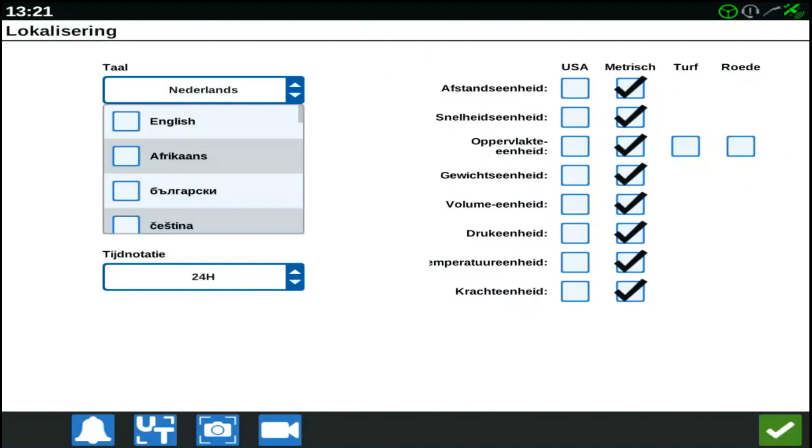And in this menu, you can do all kinds of settings. First thing I'm going to do is go to region settings, and I'm going to change the language to English, because I think that makes it a little bit easier for you as well. So now it's a little bit more universal. So now I've quickly changed the language from Dutch to English. And there's of course a lot more languages available.

So to get back, you first go to the machine garage. That's on the left side up top here. So I push machine garage. And now it will open my machine garage. And as you can see, I do not have a tractor selected nor a machine.

So the first thing I do is push this plus, and then I get the option to configure a machine and an implement. So first I have to create a new machine. So create a new tractor, push create new machine. And then I get an option to choose, for instance, a traditional, self-propelled, articulated, and so on kind of machine. Well, since I just want to have a tractor, I just give it an easy name, training tractor.

So now I just give it the name of your tractor and the model. So for instance, Case Puma, and then the number 130 or something. Then we go here in the bottom, next, and then it'll want the value, so the height of the antenna. And as you can see, that's taken, so value set in UT. What does that mean? When I go to here, we go to the UT for the ISOBUS machines.

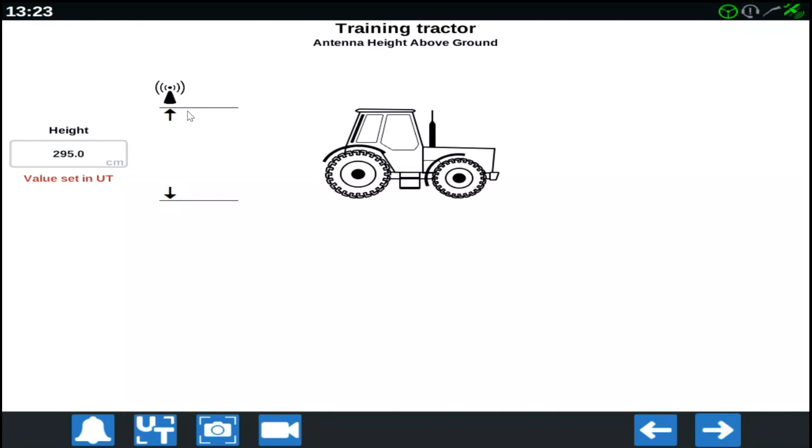Oh, it wants to load, so I'll get back to that in a bit. Takes a little bit of time, don't want to wait. So now it takes over the values from the RS1. So this is for the height.

We go to the next. It wants to know the offset from the center, which is also taken from the UT. And it also wants to know the position of the receiver compared to the rear axle. So the distance from the rear axle to the receiver. And those values are all taken from the UT. And that's from the profile calibrated into the RS1.

So now, if we go next, the system also would like to know the distance from the rear axle to the front hitch, from the rear axle to the 3-point hitch, and then to the drawbar, let's say like that, tow point. And these values can't be taken from the RS1 because those are not in the RS1. You have to measure them yourselves, and these ones are very important for proper section control.

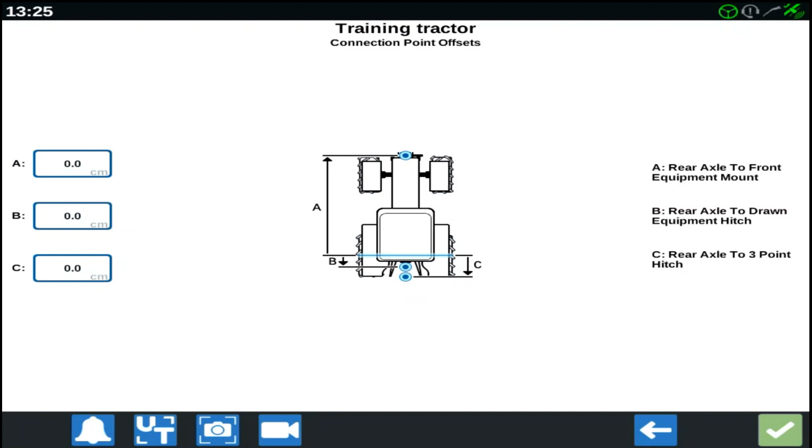So for the system to know when exactly the fertilizer spreader should start spreading. The more accurate these values are, the more accurate your section control will be. So these you have to measure yourself, and these are very important. So then we go to the green check mark. So now here up top, you can see that we have configured the training tractor in this case. And if you just push here in the middle, you can change.

As you can see, I have a long list of tractors that I've created that are in my system. And that way, if I would put my CR12 into another tractor right now, I could change from T7, for instance, to T8. So the system knows exactly what tractor it's in and what measurement it has to take into account.

So now we have set up our tractor, and now we're gonna mount equipment on the rear in a 3-point hitch. So as you can see, there's a long list of implements, but these are all virtual implements. It's really important to know they are not ISOBUS machines. So if I have, for instance, a weeder here, it doesn't do any ISO tasks. So it doesn't lift up my weeder if it's an ISOBUS weeder. And that's really important. I will show you later on how to work with ISOBUS machines and how you can distinguish them in the list.

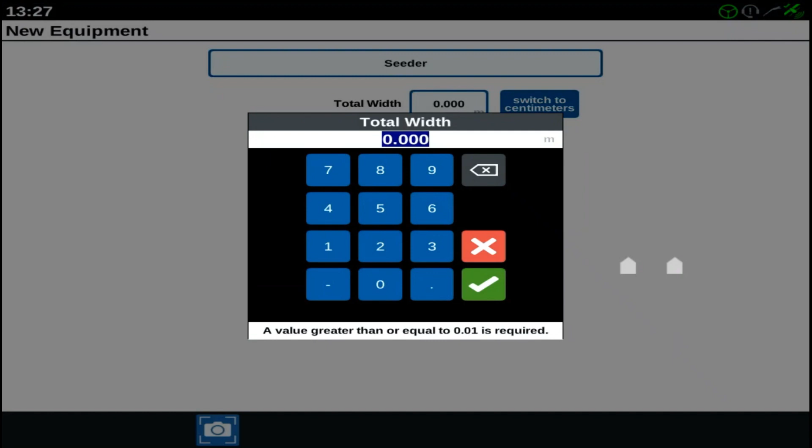And please pay attention to the units. You can switch to centimeters, but that's very important. That's also with all other units you have to fill in, pay attention to it, because I've seen it a lot of times that, for instance, centimeters were entered while the system expected meters. So if you put 3 centimeters, or you think 3 centimeters, and then it's meters, or the other way around, the system might do some strange things. So please pay attention to the units.

So we have total width of 3 meters, and then I will give it 4 virtual sections. So we go further, and now we can define the width of each section. So for instance, if one section is a little bit wider or one is smaller, I can change that as well, but I won't change anything here for now.

And then we go further, and then it wants to know the distance from the 3-point hitch to the working point of the machine. Now I'm just going to give in, for instance, 70 centimeters. Again, this is also important for proper section control.

Also, if we have an old bead seeder that usually has an offset to the right or to the left, we can also give in, let's say I want to have 50 centimeters to the right, and then it will take that into account as well. Just an example, you can also go to the left. It doesn't matter, but it takes that into account for your guidance. So now we push the green button. And here you can see that now my seeder is connected.

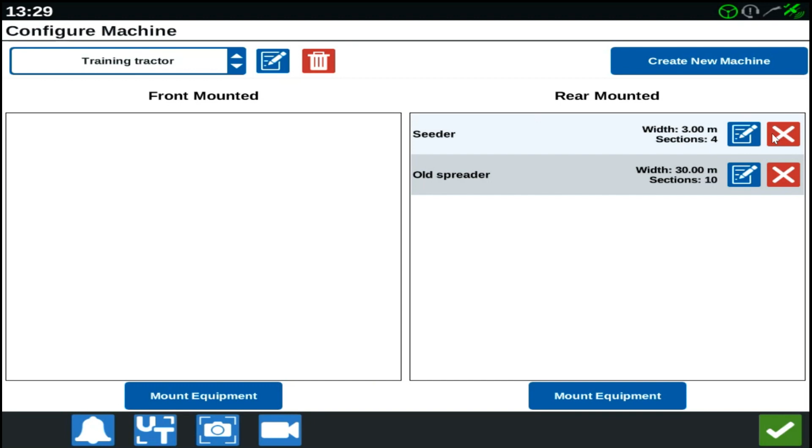Also good to know is that the cross for CRx means deactivate. So if I push the cross here, it deactivates the old spreader. But if I push the red button here, it's a waste bucket, and it will delete it. And that's for everything. I will show you again later as well. Waste bucket is deleting and a cross is deactivating. And the pen and the paper, that's always editing.

So now we have a tractor, we have a seeder, and now we are ready. You can see it here as well. We are ready to start a job. So now we go back. We push the green button here. And then we are in our start screen again.

So as I explained shortly earlier, there's 3 ways of working. And first I will discuss the quick job, quick AB line. So if you want to do quick AB, then you gotta push the button right on the bottom here. This is for quick AB. So if I push it right now, it will open up a menu where the grower is already filled in, the farm and the field. We always work with the grower, farm, field. And then also the job name.

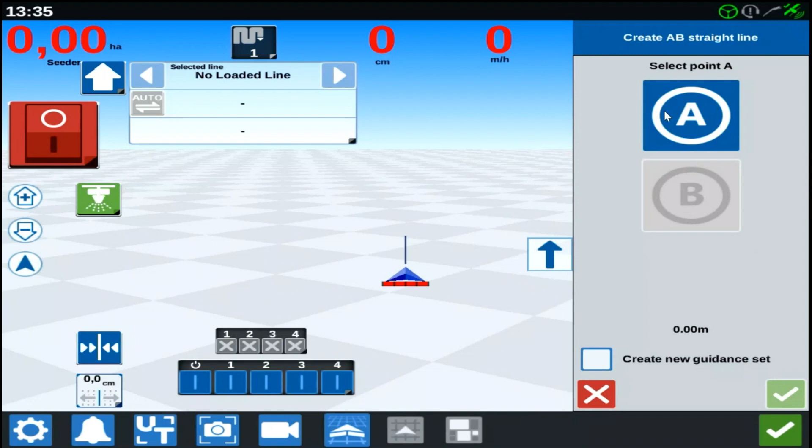So first we're gonna start, because it was a quick job. We want to have an AB line. I push the line button and then, in this case, I select AB straight. So now we push the A button and then I start driving forward. Oh, it wants me to accept it. And as I am turning, the line is also moving with my position. If we look from the top here, we can see it a little bit better. So if I go to the left, the direction of the line is also moving with me.

So now I'm at the point where I want to be, and it's good to know that the minimum distance for the AB line is 10 meters. So that's good enough, because I have 132 meters, as you can see here. I push B. If I want to change my position for B, I can do it now if I wanted to, but I don't. And then I push the green button on the bottom, and now I have created an AB line.

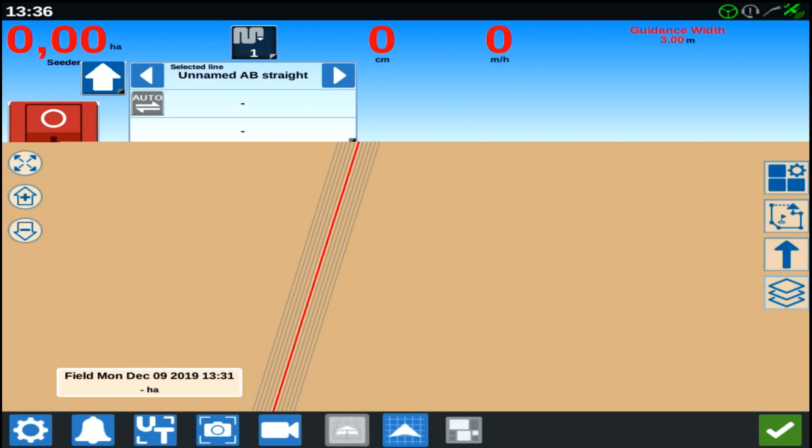And now when I move to the line, I am able to start my guidance. So now we have created an AB line. Real easy, and now I can just go and mow and drive around. All right, so now we have an AB line. We come to the headland. Even though it's an easy task, not too complicated, I still want to have an additional line. In this case, I want to create an A plus.

I go to the line option again here on the side. As you can see, now AB straight is selected. But I want to give it another name, because otherwise later on I do not know what the name was again. So now we push the pen and paper, and I change the name to straight line. So now I know.

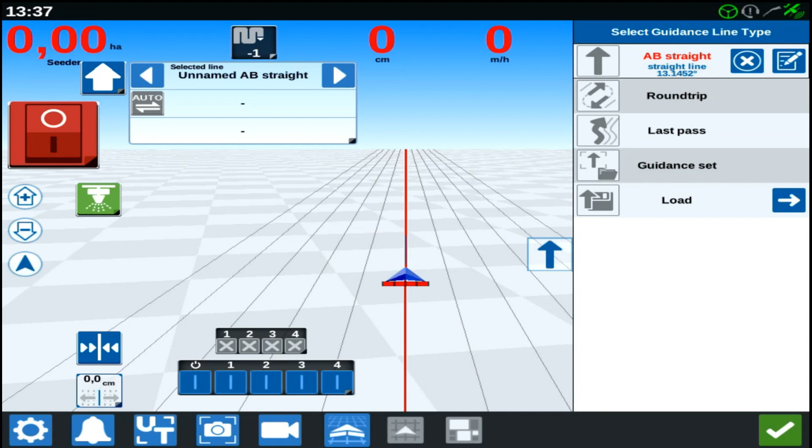Normally, of course, you will give it a name that suits you, across the neighbors, alongside the ditch, whatever. But now I just do it easy, straight line, accept it, and now I have named my line. AB straight, and it's called straight line. So now, like I said, I want to create an A plus line. I push the cross, so that means deactivate and not delete.

And you will see it as well. If I push it, it says confirm clear guidance line. It doesn't delete anything. Now, if I push this green button, my line is still there, but I cannot see it at the moment because I did not select it. So now I turn around.

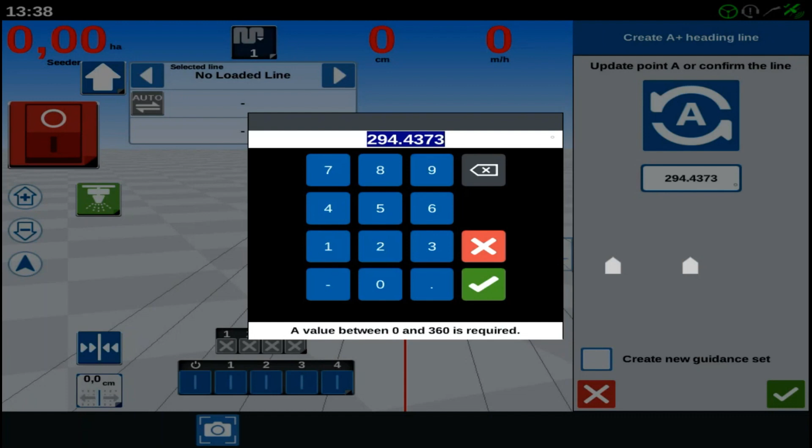I select A plus, because I want to do a line based on the heading. And now if I know the direction, I can already give it. So if I say I want to drive, so now I've pushed the button here, and now I'm able to change the direction to whatever I like. So if I say I want to drive on 280, so that's 280 degrees on the compass.

I can give that in, or if I do not change it, just take the direction I'm currently standing. So now I've created an A plus line. I push the green button again. And now I have my A plus line. I can drive on that as well.

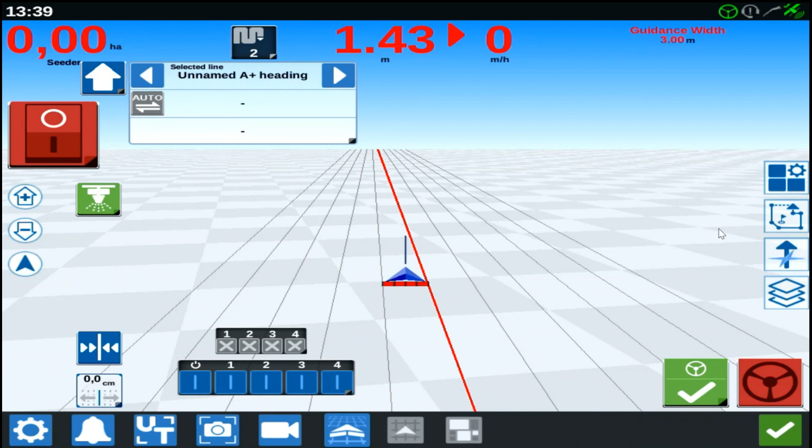So now I come to the other line again. And first I will show you a little bit the long way, and then I will show you an easy way how to switch lines. Because now I want to switch lines from my A plus line to my AB line. So how do I do that? I go here to the side again. I deactivate my A+ line.

So I had my A+ line, and now I wanted to go to my straight line. So now you can see I've loaded the straight line again. And that way I can change lines. Well, as you can see, that's maybe a little complicated because you have to push a lot of buttons. So that's why we come to the next thing. I go to the widgets because we have a nice widget for that to switch lines.

So we go to the widgets, and that's the top one there. If I push it, you will see a list of widget profiles. And as you can see, this one, Ronnie, is created by myself. And the other 4, sprayer, implement steering, default, and crop, are already in the system by default. It's possible to change them to whatever you like, delete them, you can do whatever you want.

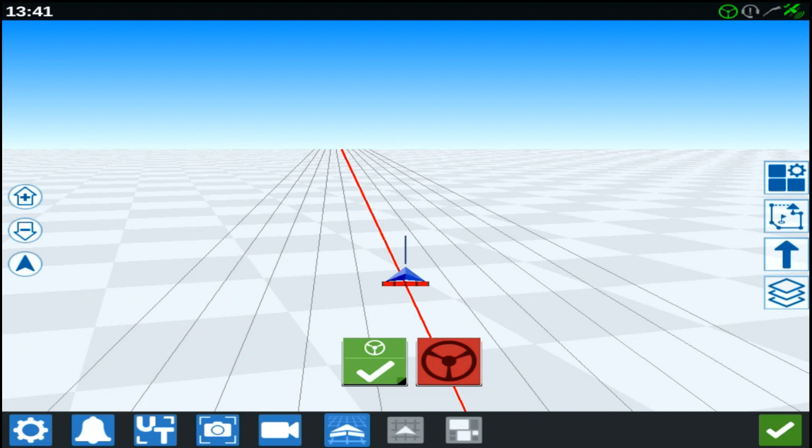So now I've selected something else. If I want to have the default layout, well, this is what the default layout roughly looks like. So with this, it's possible to create your own profile, but if I want to change the profile, I just push the pen and paper on the side, and then it'll give me the possibilities to change the name, to change the position. As you can see here, I'm now moving this one. You can change the widget profile to whatever you like and to whatever you want to see.

So if I push this button now again, I've activated, as you can see, the layout edit. If I push it, then it also enables me to move this button all the way to the right side if I want to. How do I get out of it? I just push this button again. The menu will open and it will give me the widget list again. Then I can push the cross again. And now I'm out of the editing mode.

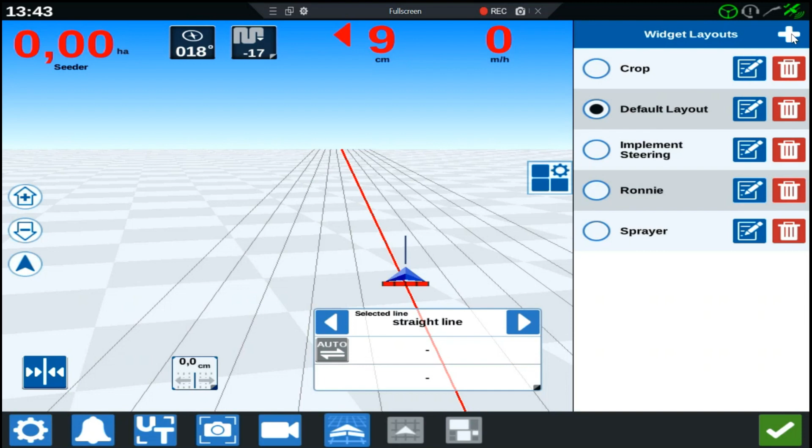I can also create a new widget profile. So for instance, I want to create a widget profile for each of my workers or for each of my tasks. For instance, if I want to see certain widgets when I'm seeding or spraying, I can add my own profile here. So let's say weed.

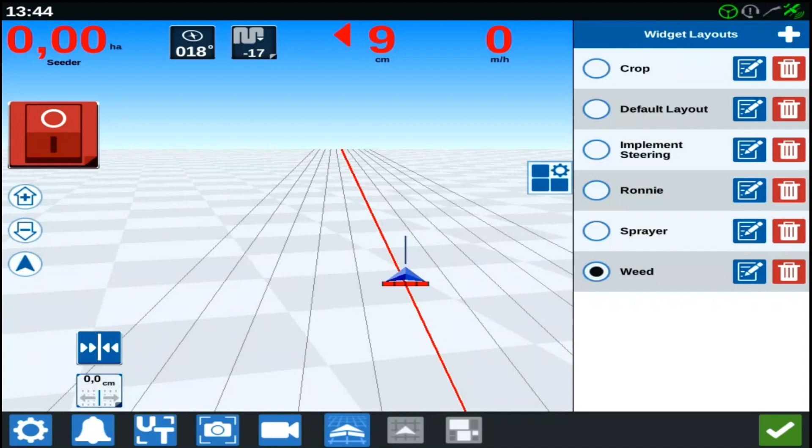And now I can add different widgets, as you can see. So there's a lot possible with the widgets, and you can change it to whatever you like. And there are a lot of widgets, and I won't discuss all of them, but there are a couple of widgets that I would like to discuss right now.

So I'm going to go to the default profile for that. I'm going to open up the widget by pushing the pen and paper. And now I have the list of widgets. And as I said and showed, the method for changing lines was a little bit complicated. And that's why there's this nice widget called Easy Swap. It's already enabled, but I'll just disable it and enable it so you know what it looks like.

If I disable it, it's gonna go away. And then when I enable it, it'll pop up right back here. And I'll drag it to the bottom because I want to have it in the bottom. So now I have the easy swap, and I will show you how to work with that because I think it's a real nice feature, a nice widget that we have.

So as you can see, it'll currently also tell me which line I am on. So at the moment, I'm on the straight line. So now by pushing this or this button, since we only have 2 lines, I can easily change my line. So now it's on unnamed A+ heading. Then we can go there. I come to the headland. Then I can push this button again and I will go to my straight line.

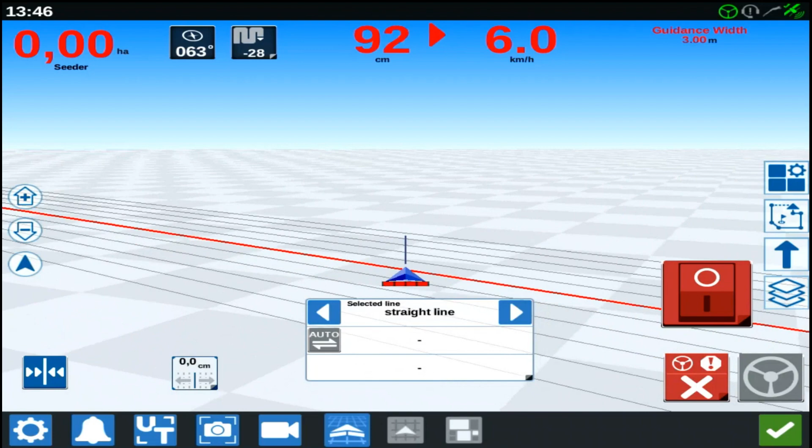Yep. So as you can see, it now also tells me recommended unnamed A+ heading. So if I now push on the recommended, it'll swap my line. It'll change my line quickly. It measures the direction you're going in, and based on that, it will give you a recommended line to take. So that way you can easily, with one click, change lines.

It's of course also possible to do that with the auto function. So now I have the auto function enabled. As you can see, now it's green. So now when I'm turning around, at some moment it will detect the direction of my straight line again. Oh, and now you can see that it will automatically change lines. However, as you can see, this takes a little bit.

This takes roughly up to 5 seconds because you don't want the system to directly change lines when you go into that direction, because then it might be too early or too late. So yeah, it takes a little bit of time for the system to change the lines. So keep that in mind when you activate the auto option.

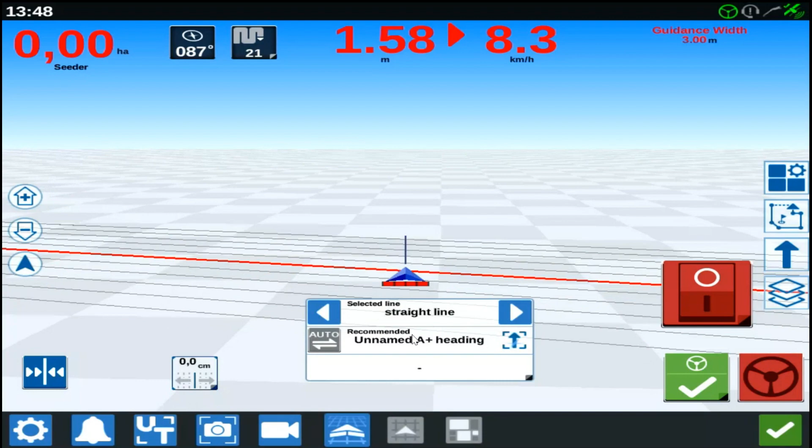Now I just push recommended, not auto, not anything else, just push here, recommended, and then it will change the line for me to the other one. So that's way easier. So that's the easy swap. Please remember that. That's way easier than deactivating the line, going to load the line, and so on.

So now we created 2 lines, and then it could be that in the end, or at the start, you created a line, but it's like this. As you can see, the red line here is already the field border, so I can't go there. If I go there, I'll be driving over the fence. And if I go over to the line that's currently red, I'm having like half a working width uncovered. So that's not what we want.

Then we have these two. If I go to the widget, I will look up the widget name again. That's called line calibration. So calibrate line. And then it's called line nudging. Just move these ones here.

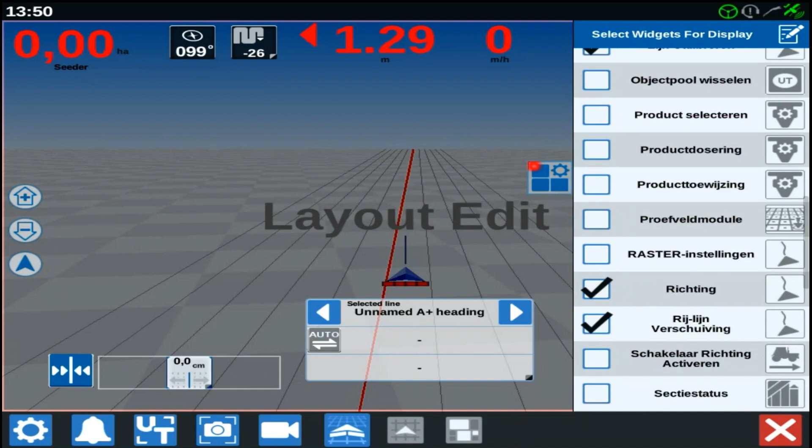So these are the two. So now, like I said, I want to calibrate my line. So I push this button and now it will calibrate it onto the center here, as you can see. And what you will also see is that the nudge widget shows me how much the line has nudged compared to the original line. So that's real nice to know, because then you can keep that in mind as well, or as we're going to go to, you can set it to a desired distance.

I hope you can see it, but in the bottom here, and that's also what this one has and this one has, there's a little edge folded inside. That's also for this one. So it means that it's an interactive, let's say it like that, widget. As you can see, if I push the widget once, a menu will open and you will see some arrows, big arrows and small arrows, left and right.

If I hold this nudge widget, a menu will pop up. And this menu will give me the option to set my nudges. So my small nudges, I can set it to 20 centimeters or 50, or I can even set it to meters, depending on what you want to do. And I can also do a big nudge. So now I want to do my big nudge, 50 centimeters. So every time I push the big nudge button, this one, it will go to the side, to the left or the right, 50 centimeters.

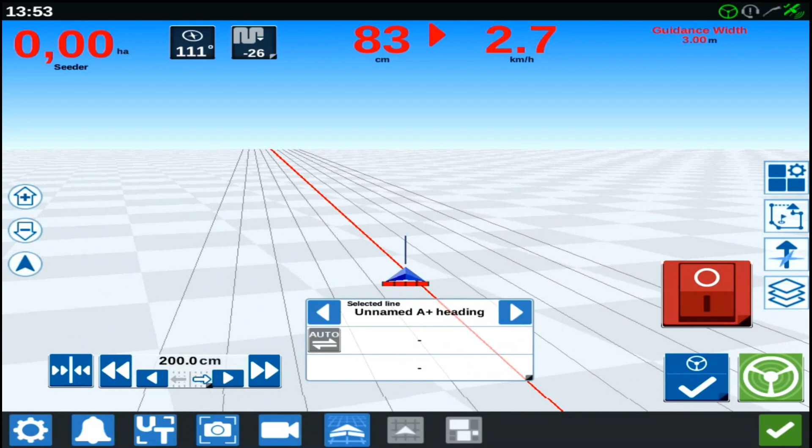So now if I push the big button here, it will nudge 50 centimeters. And that's what you will also see. Now it's 100. Now if I push it twice, it will go to the 200 and so on. So with those widgets, you can nudge guidance lines the way you want to.

If I want to create another line, I will have to deactivate my guidance line. But I have my line nudged and I don't want to lose that. So you will see what will happen. I will show you where to find that option. If I now disable it, a menu pops up and it gives me the option to override the original unnamed A+ line. It will give me the option to save it as a new line, or I can just ignore everything and discard it. So I just save it as a new line in this case. And now it'll ask me to deactivate the guidance line.

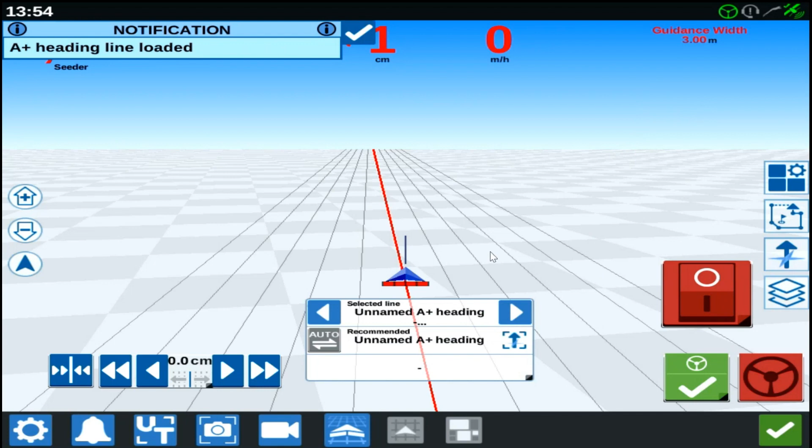So now I have the original line and I have the original line plus 200 centimeters. If we go to load, you will see that as well. Unnamed A+. And now I have the line I just created.

How do I get there? Or how do I get that pop-up if it's not enabled? You go to the menu, so the gear, you go to job settings, and then you have the enable nudged guidance line management pop-up. You can disable that if you want, you can enable it. So that's enable nudged, this option.

So now we spoke a little bit on how to create lines and so on. I just saw a question on how to do the round trip and the last pass functions. I will show you that later because for the round trip, I need a field boundary. So now I've been driving around in my tractor just kind of without anything going on.

And normally you kind of want to know where you have been driving. And that's what this big master switch is for. Now it's red, but now I push it and it will turn green. So now my implement will start drawing coverage and I will be able to see where I have been driving. If I push it again, it will turn red and so on.

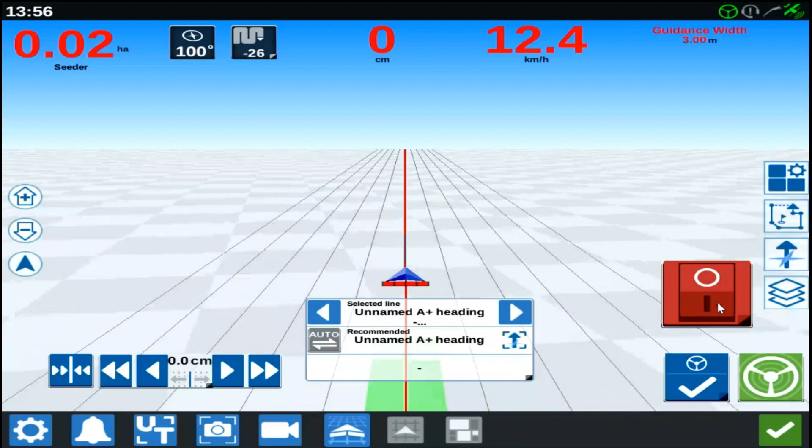I can also push this button again and then a menu will pop up. And then it will give me the option to activate the master switch, for instance, if I start steering. So as soon as I enable steering, the master switch will activate as well. And it's also possible to have auxiliary inputs. So take a signal from the hitch or whatever; it requires a 0 to 12 volt signal. And then, for instance, if the hitch is going up, the master switch will deactivate, and if the hitch is going down, the master switch will activate.

You can also do multiple signals, and if I require all on, then, as an example, I need to have steering enabled and I need to have the hitch down before the master switch will activate. It's just an example. There's a lot of possibilities in that as well. So now if I do steering, you will see that the on-screen option is disabled and steering is enabled. And now you will also see this little lock. It means that no matter what I do, if I push it, I am not able to disable the master switch. I'm only able to do that as soon as steering is deactivated.

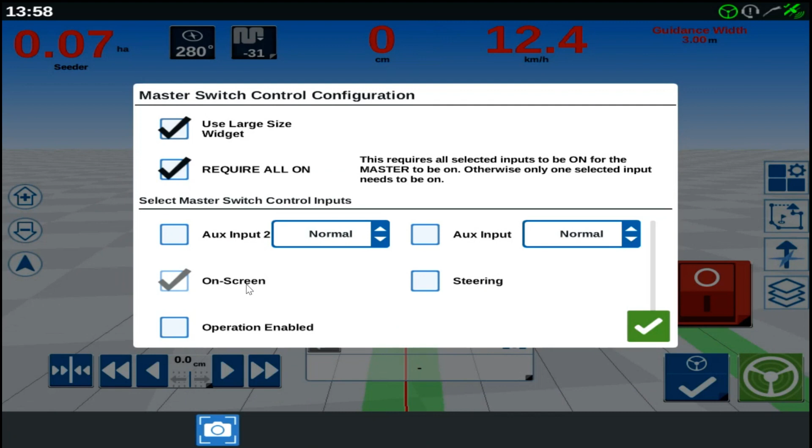So if you ever want to enable or disable the master switch, but you can't, just hold it a little longer and see what control inputs are required. Then you know how you can activate or deactivate it. That's something to keep in mind: if you see the lock and you want to start drawing coverage, but you do not know how, or you are not able to because of the lock, just hold on and you see, oh, steering, for instance. Now I disable the steering and then it automatically goes to on screen. So now I am able to, by just pushing it on the screen, start drawing coverage.

Well, like I said, then we go to the next features I want to discuss shortly. If we go here, I can do a scout feature, and then I'm driving in the field and I want to say, hey, there's a point of interest. I can say where I want to have my recording point, and I will explain a little bit more later on the recording point. But for now, I'll just click somewhere and then I have to create a name. Let's say like the tree. I say create recording point, and then every time I come back in this job, I will see where my tree is. So that's just a good thing to know.

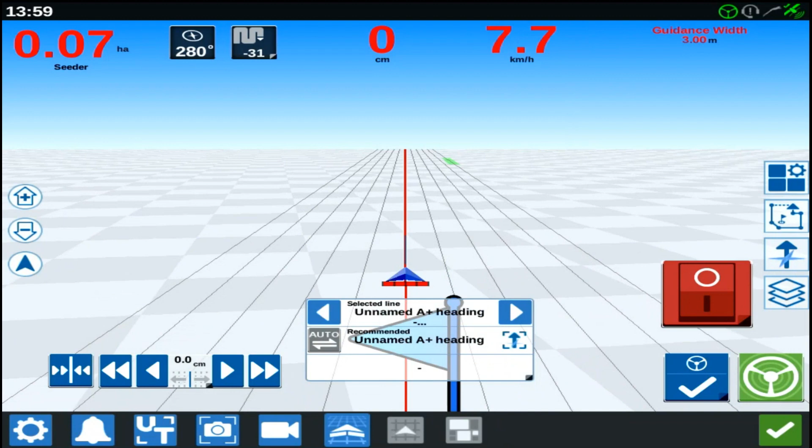And about the layers, I will get back later, because for that I need to have drawn a little coverage, and I will come back with a bigger implement. So now we've discussed a little bit on the quick jobs and the most important widgets for now. Of course, there's always more widgets. As you can see, there's a lot more, but to keep it a little short, because I could talk on it for hours and hours, I will just continue with the rest. So we have our job, and to get out of the job, we just push the green button, and then it'll show me confirm close job. Push the green button, and now we are out of the job.

So now we get to the second, a more advanced, let's call it like that, way of working, based on field boundaries. And in that, again, there are multiple options. So I'll first go through the, for me, easy one, because we can create field boundaries in CRx in two ways, with corner points and with a quick recording. That's what we call it. I'll show you that in a bit as well, but I'm gonna do the easier one first, and that's with a field boundary that's drawn in on the computer.

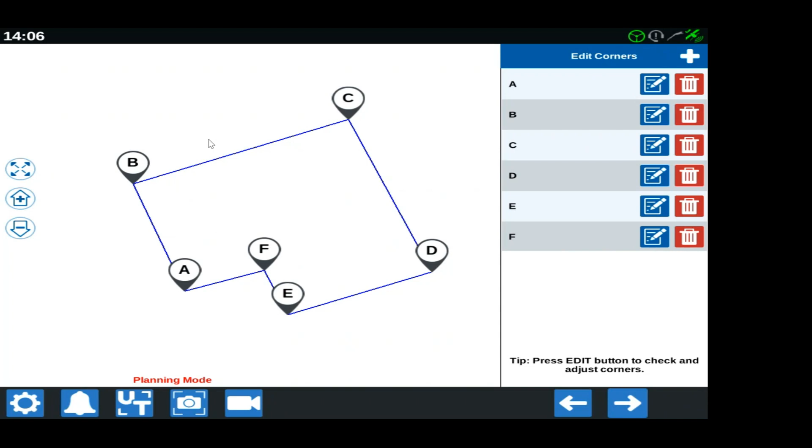So now all my corner points are there, so I'm not going to do that. But in a bit, when I create the field myself, I will show you how to do that. But it's also possible to change the positions of the corner points if I want to, and so on. And if we continue here, then you will see that the system now creates the field boundary lines based on the corner points we just created. So now you'll see A, F, E, D, C. Those are all guidance lines I can later on use.

And now if I select the field again, go to the next step, do a new job, push the button right, next and next, because for now this doesn't matter so much. I have my guidance lines, and now it will ask me, what line do you want to use? A, B, C, D, E, or F. And as you can also see, it's not really noticeable, but I've drawn a line in here as well. It's called to neighbor. Normally it will show you baseline, E, F, and so on, but it will also show you the guidance line you want to be driving on.

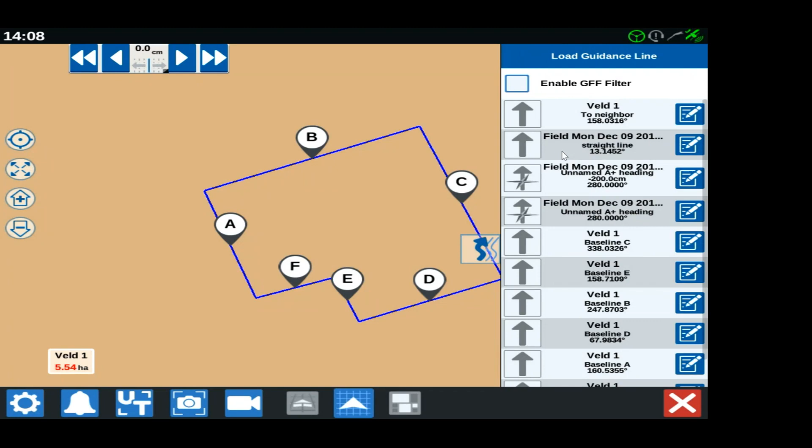However, for now, I'm just going to leave that. I'm just going to select line, so baseline C as my guidance line. And as you can see, I'm a little bit far off the field. I'm just going to go speed and power, full speed ahead to my field.

So now in my field, and as you can see, the first guidance line created is half a working width from my border. So I'm starting right, so the outside of my machine is exactly at the border as how I have drawn it.

So now, as you can see, it also shows me again the desired or the recommended line, and it also shows me all the possibilities that are there in the Easy Swath widget as well. So now if I come to the headland, I'll just go full speed ahead. And if I then turn around onto the headland, it will also show me line B.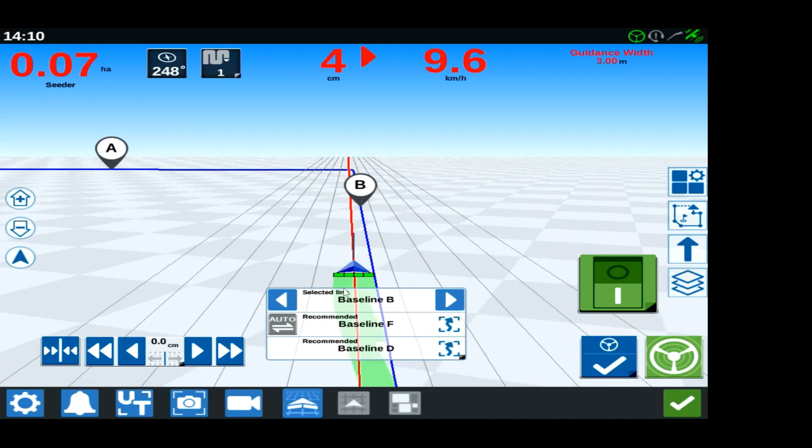If I now select baseline B, it will automatically change the lines, and then I'm able to continue on line B. So in this way, I can use the outside, so the field boundary, as my guidance line.

So now we got the question in the chat, how do I use the round trip? So therefore I disable the current guidance line. Oh, I shouldn't. It wasn't necessary, but I'm going to do it anyway. And then I'm going to push round trip. And what the round trip does, the name kind of says it already. It does a round trip from the outside of the field.

So at the moment I have 6 lines, so 6 times 3 meters. So 18 meters will be going around the field. So now you can also say, I want to start with an offset of 3 meters. So one pass not seeded at the moment. I can give an offset, and then to really work with it, I have to push here field 1. So now I have 6 lines, field 1, and then it'll start. As you can see here, it has drawn 6 lines around the field.

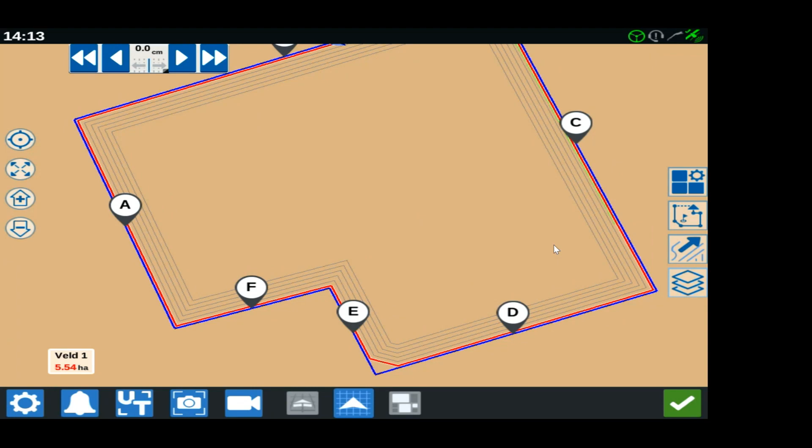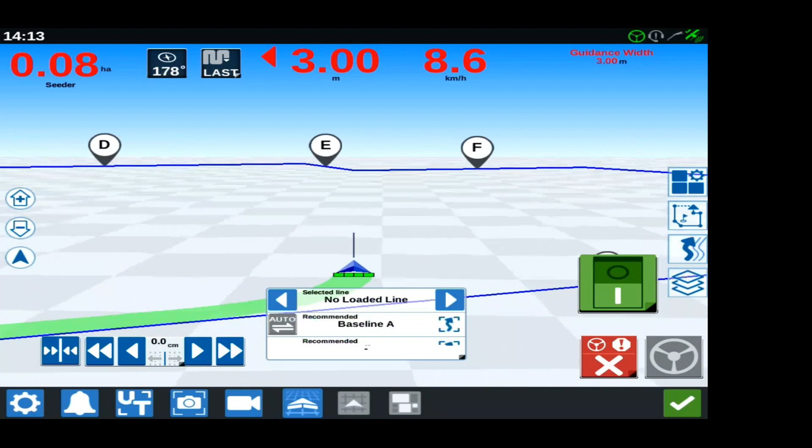Then what last pass does, last pass creates a guidance line, as you can see here, based on your last laid coverage. So if I slowly try to drive forward, for instance, it's used a lot in spraying. You just start on the outside. Hopefully, let's try. So now I have last pass enabled, speed up a little bit.

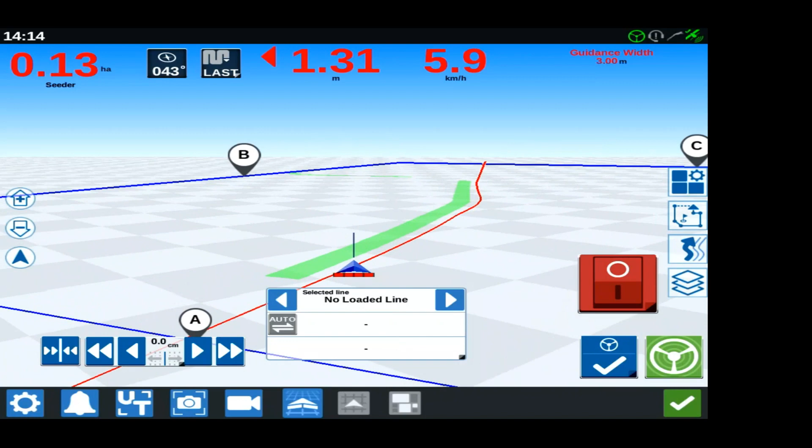Now when I come back, it has created a guidance line that is half a working width away from my previously created coverage. So that's what last pass does. It creates a guidance line based on your last created coverage.

So now I've shown you how to load a field from, for instance, a USB stick. And then I suggest we do a short little break until 8:05, so roughly 5 minutes. And then we continue on how to create field boundaries yourself in CRx. And I'll also then discuss the operations plan and the ISOBUS settings. But I suggest we do a short little break right now.

Quick break. I hope everyone could grab something to drink, fill the glasses again. Now we're going to continue with the creation of fields, and therefore I'm just going to drive a little bit away from where I'm currently at.

So I'm just going to start here. And then I'm going to go to my fields here again on the sides. And then I'm going to create a new field. I'll select my own grower, myself. I select my farm, it's the test farm. And then I give the field a proper name. Give it something that fits you best. Call it at the neighbors, or whatsoever. We're going to continue here.

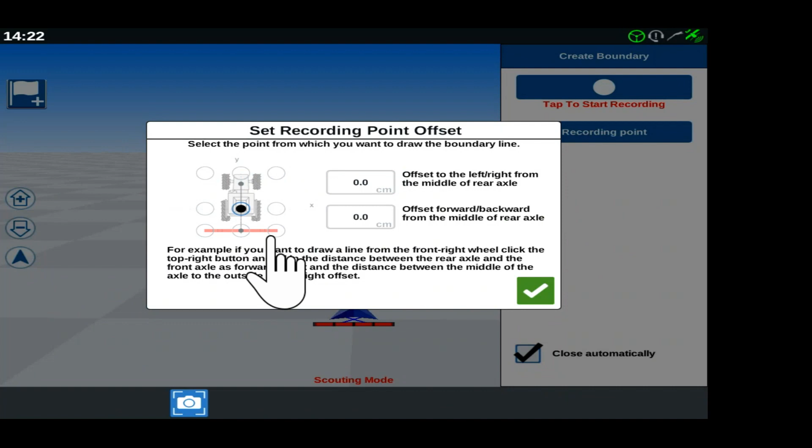So if I go to quick recording, select it, and then we get to the scouting mode. And as you can see, this here is the tractor again, and this blue cross is our recording point. Put this away. That's my recording point. So if I push here, recording point, I can set it to wherever I like. If I want to have it onto the center of the tractor, I'm not able to change it, but I can also set it to the right side of my implement, depending on the measurements I've given in. So I can put a reference point wherever I like it.

There are customers that create a little device that they use to record field boundaries, and then they can set it exactly to where the device hits the ground, so they can record the fields as accurately as possible. So I accept it. So now my recording point is there. And as soon as I start recording, tap here to start recording, you will see that it'll start blinking red. That means we are recording, and as you can see, there's a blue line. I'll just zoom out a little bit so you're able to see it better. So there's a blue dotted line coming behind the tractor.

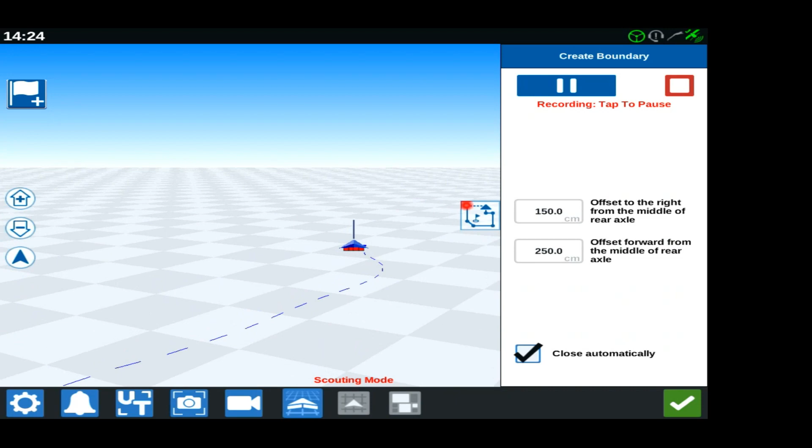As you can see, as I'm moving around, the field boundary is also moving around. So if you're going to do this, make sure to get it as accurate as possible, that you drive as straight as possible, and do not do anything else while you're doing it, because otherwise the lines are also coming along. So now, for instance, I get to a point where I can't continue. There's a tree in the way, but my boundary is still straight, and I don't want to mess up my boundary. I can just press here, then it will pause the line. So then I can drive around the obstacle.

And then as soon as I'm past that object, or the corner, I can just push here and it will draw a straight line between the last point I've driven and the point where I started recording again. So I go around the corner, for example. I'm trying to get a straight corner. And now I continue again. I'm speeding up a little bit at the moment, and as you can see, my driving gets less accurate. So this is the field I now created.

So now I pause again to try to get a rectangular corner. I'm speeding up a little bit. So as you can see here, these lines are not straight. They are exactly how I've driven them, very curvy. And as I'm getting close to the corner point, as you can see on the bottom right, I've enabled the option close automatically. So now when I get near the starting point, it closes the field automatically. And now I have created my field boundary using a quick recording.

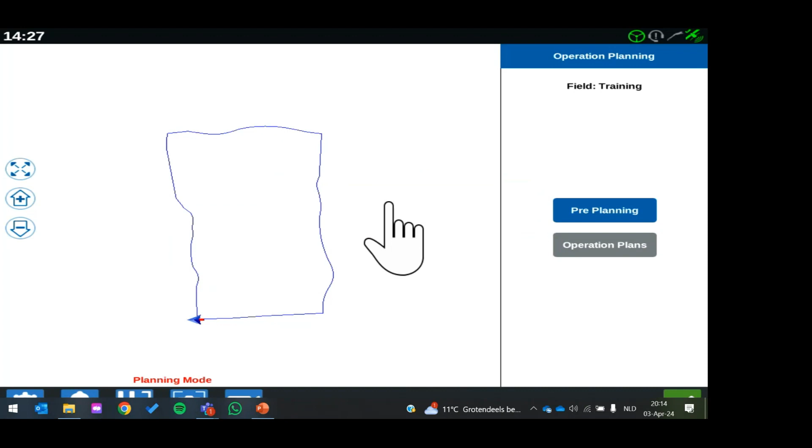All right. And then, so now I've created my field boundary. So then I go to operations planning again, because we have to go to the pre-planning again. So now I push pre-planning. And as you can see, the system has some more difficulties in detecting my nicely created corner points. So now I would really like to change some of these corner points.

It's also possible to move it with this button or with these buttons, but be careful because these buttons move the corner point north, south, east, or west, and not in the direction of the guidance lines. So yeah, be careful with that. I usually say try to prevent doing that.

Oh, no, it's go away. No, no, apologies. This is better.

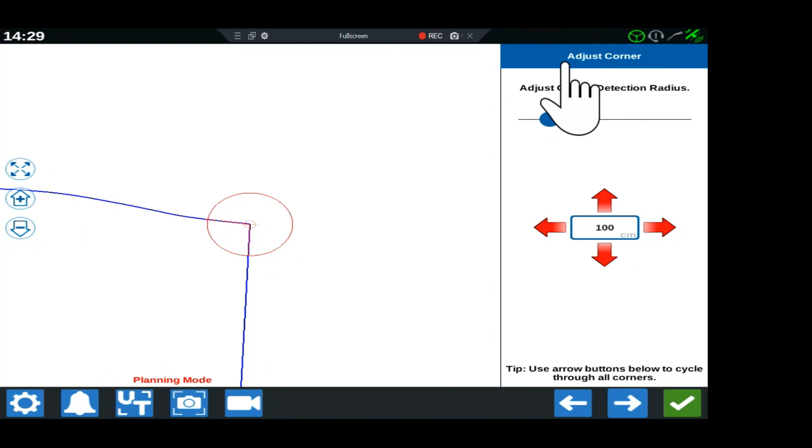So I usually say prevent moving with that because usually you can't get the desired results, but it's possible. But at the moment, I think my corner point's good. I push the green button. So now I've added my corner point there, and I also want to have a corner point there.

So I push add a new corner point, click there. And as you can see, it depends on my radius where it will put my corner point. So if I increase it, I want to have a straight corner. So this is how I like it. So now it's created a corner point there, and I want to delete in this case because I do not agree with it. I'm going to delete corner point A. So now I have 4 corner points.

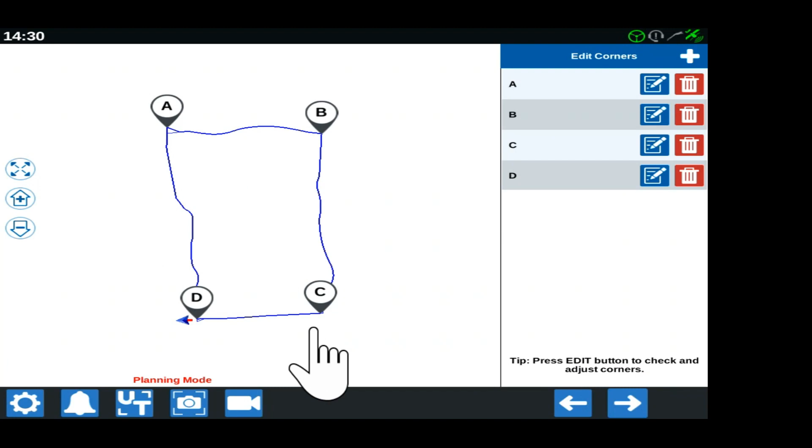When we continue, it'll detect my lines. And now I can also say, hey, they are curved, but I want to have them straight. So if I straighten them all out, you will see what a difference that makes. It will just draw a straight line between each corner point. So I'll just leave B and D as a curved line, and A and C I will have a straight line. And now I can drive on those curved lines as well as on those straight lines if I open up a new job.

So that's the first possibility of creating a field boundary. Now we're going to go to the second possibility. Then I'm driving further again. Up, up, up, up. So then I'm going to add another field. And I call this field, just to keep it easy, corners, as I'm going to create a field based on corner points.

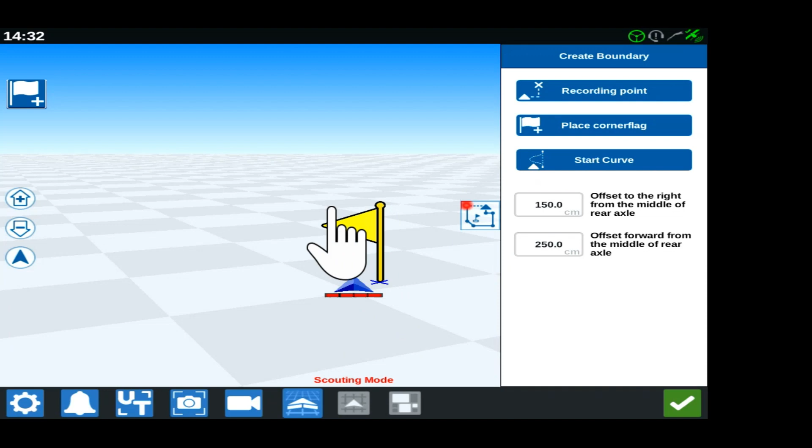So now I'm going to go to field recording. I'm going to record corner flags. And now you kind of have the same options. We can set the recording point in here again. But now I want to be a little bit closer for now, so I'll leave the recording point. And now I just turned into the first corner of my field. And now I'm just going to place a corner flag. So now a yellow flag will pop up, and that means that it's a corner point.

So when I zoom out again and I start driving, you will see a red dotted line being drawn. I'll just go from the top view because that makes it a little easier for displaying right now. And again, this works kind of similar to an AB line. It will draw a straight line, but it will follow my direction. So if I move around, the straight line will move around with me.

So now I come to the second corner and I place a corner flag, and we'll see a second yellow flag popping up, and you will also see that my red dotted line has now turned blue. So that means that it's fully defined, and it won't change anymore. So now we go around the corner.

And now I'm gonna start with a curve because my field doesn't have straight edges all the way. It has a curved boundary, a curved field side as well. So that's why I'm gonna start a curve right now. And don't start a curve right away as soon as you place a corner flag. Just drive a little bit forward.

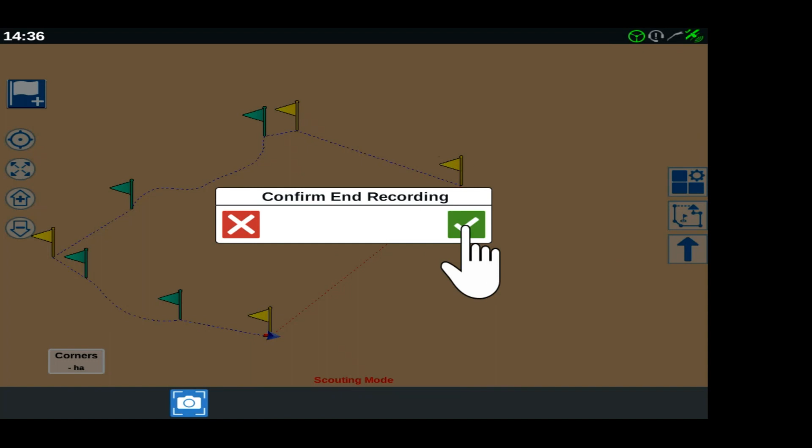And then I say place corner flag, and now when I quit the recording, it will automatically draw a line between here and there, so between my first and my last corner point. That way it will close the field. So now I push here, and as you can see, it will ask you to confirm end recording. I say yes, and you will see a line being drawn here. And now the field is complete.

So now I have the option to add another boundary. I personally do not recommend that. It's possible, but the best way would be to create for each field its own boundary and not two boundaries in one field. I can go to the pre-planning, that's where we fully define the field. And it's also possible to add a guidance line.

So if I want to, for instance, later on do an operations plan based on an A+ line or an AB line, I can, before I go to my pre-planning, already add a guidance line. So if I know in what direction or along which side I want to have an extra line, I can already do that right now. Or I can go to the home screen, but we are going to go to the pre-planning.

So this is our field boundary. Now we go to the next page, and it'll show you all the corners we just created. As you can see, not all corners can be edited. They can be deleted, but not edited. That's because F, G, D and C are curve points. Like I said, the green flags, and you can't change those. You can only change the yellow flags.

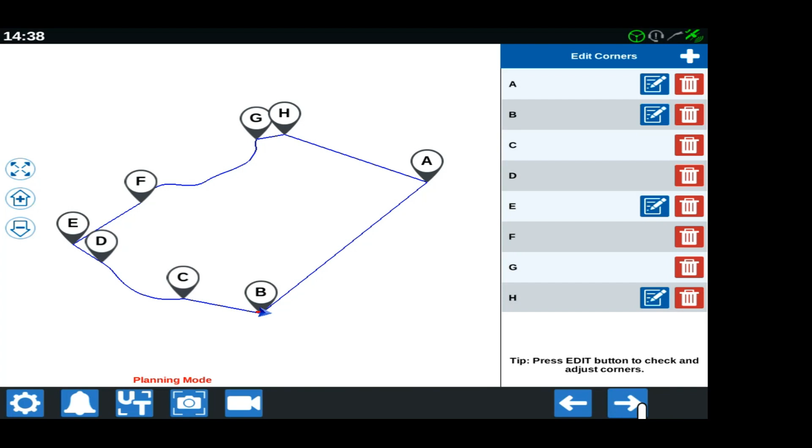However, at the moment, I'm fine with the way my field's looking. All corner points are there. I go to next, and now I have the same lines. Like I said, I can straighten them out. In this case I don't care, but I want to leave F as a curved line. However, I don't want to be switching lines. So when I go from E to F and from F to G and so on, I don't want to switch lines every time. I want it to be one line.

I can then push here, join lines, and then select F, G, and E. And if I push here, it'll create one guidance line of it. Again, I can straighten it out. Or if I think later on I don't want to have it as a joined line anymore, I can also split it again. But I also want to join lines for the bottom, B, C, and D. So now I have 4 lines again.

Push green. So now, as you can see, before, the pre-planning was blue and operations plan was grayed out. And now we finished pre-planning, so it's green, and the operations plan is now blue, so it's possible to create an operations plan.

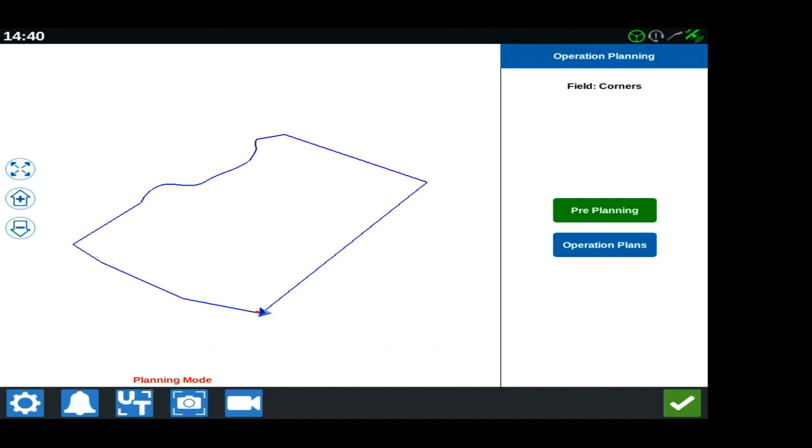So what's this operations plan then? I already discussed the first two possibilities of working with CRx, the quick job and working based on reference lines from field boundaries. So now we're going to go to the operations plans.

And with operations plans, I always say, call it the crop and the year, what you're doing. So if you're doing potatoes, I'm going to call that potatoes 24. So I will be using this plan that I'm going to create the entire season for my potatoes. And what does that mean?

So I will create a swath where my potato planter, my ridger, my haulm topper, everything is on 3 meters. And then every time I will use the same plan. So here you define the working width of the main machines, let's call it like that.

Then we have the option to set up tram lines if we want to use tram lines. So now we can say tram lines, and there you get the option to set up the type of sprayer, if you want to use extra width, and how many swaths there should be from the field boundary, the reference line, to the first tram line. So at the moment I have a sprayer width of 33 meters, and then it will automatically say 5 swaths to the headland. Of course, I can change this, and then between each tram line there will be 10 swaths.

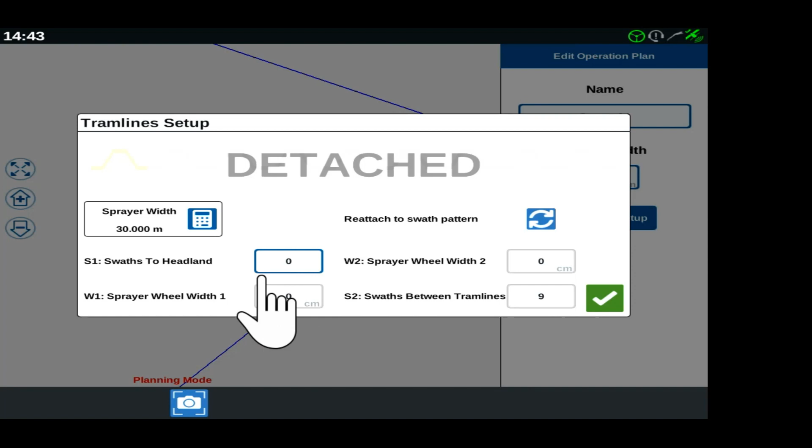So as you can see, now I'm spraying with 30 meters detached from swath pattern, and 0 extra swaths to the headland. So now if I continue and I have selected region A, you will see that the tram line is in between working swaths. Whereas in the previous situation, where it was 33 meters and attached to the pattern, a tram line was on a working line. So with this option, it's possible to use sprayers where the working width doesn't match with the pattern when you're working, for instance, with 3 meters.

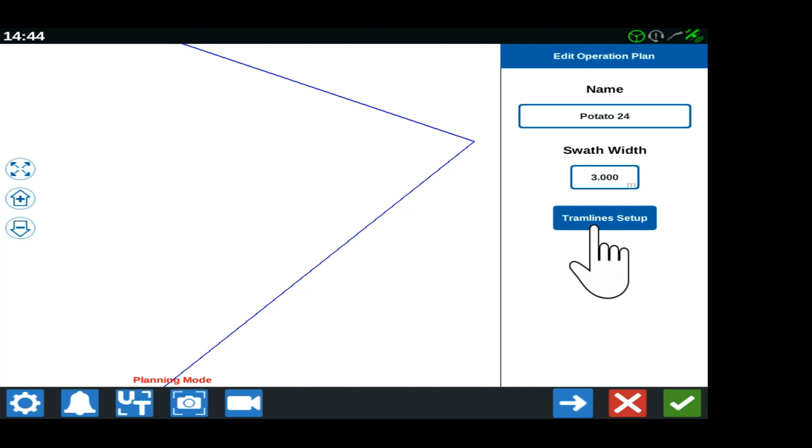So now we go back, we say tramline setup, we reattach it again, because if we have 3 meters, it's then also possible to add some extra width in the tram lines. As you can see here, I've added some width on the left side, and I can add some width on the right side. So there will be a working pass, and then on the left side and the right side of the pass, there will be 1 meter extra.

So when is this used? A very nice example is in the Netherlands, where they have tulip fields and they plant on small tires, think 38 centimeters. And when they come back and want to go spraying, they don't want to drive in between the beds on small tires. They want to have a little bit extra width between the beds in the tram line to be able to drive on wider tires. So this way, it's possible to drive on wider tires for spraying.

Of course, also when you, for instance, do potatoes in the tram lines, you can put the cultivators down. So then there's 2 paths of 75 centimeters that are not planted. And if you want to spray on tires that are 60 centimeters, as an example, you can say, I want to have a negative spray wheel width. So then your tram lines will be 20 centimeters less. So if I put this to 10, in total they won't be 3 meters, but 2.80.

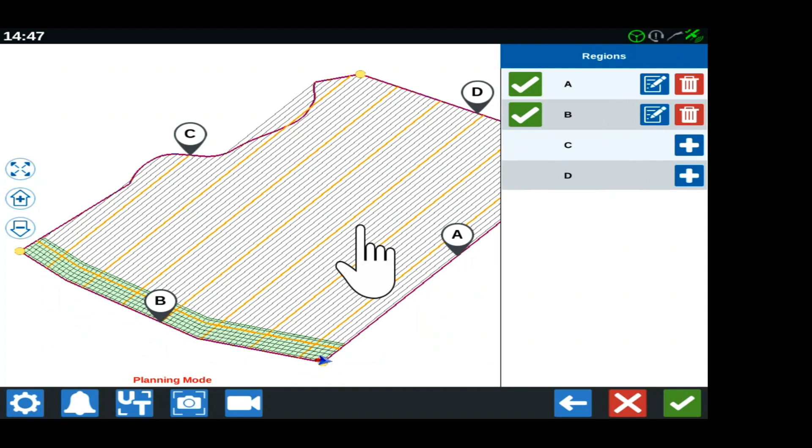So now I am also able to add or change my main region. So if I go here and push the pen and paper, I'm able to change my main region. As you can see, there are different options. I can set it to a headland. I can give the number of swaths. I can also change the direction. I can also give it an offset to the field boundary.

So for instance, for my first pass, I want to leave the first 3 meters from the field boundary because I want to seed flowers later on or whatsoever, but I first want to start potato planting. I can set offset to field boundary to 3 meters. So then my first guidance line will be 3 meters plus half a working width from region A.

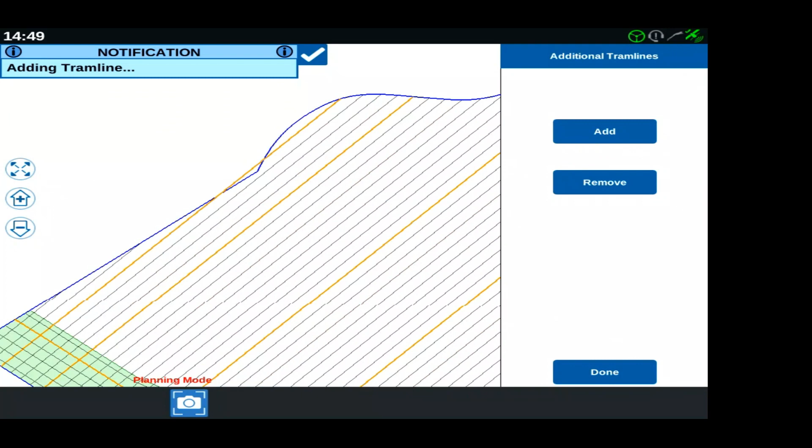I can also add an extra zone width. However, from here you won't see that very well. And I can also add additional tram lines. So for instance, in the end here, you see that there's 1, 2, 3, 4. And for these last 2 swaths, my sprayer is not wide enough. So then I'm able to add another tram line. Say I want to have a tram line there, and now an additional tram line is added. So that way you can add a tram line if you want.

It's also possible to remove a tram line, and now it will automatically change the one I created last. It's also good to see that if I add, for instance, a tram line here, so I've added one here, it will automatically continue the pattern, starting from here again.

Good to know is that you cannot add a tram line in the first, in this case, 4. So you cannot add a tram line before your first tram line from your field boundary. So here's the field boundary, and in the previous step we said that the swaths to headland is 4. So the first tram line is 4 swaths away from the headland. We defined the first tram line, so it's not possible to add a tram line before the first one. So that's just good to know.

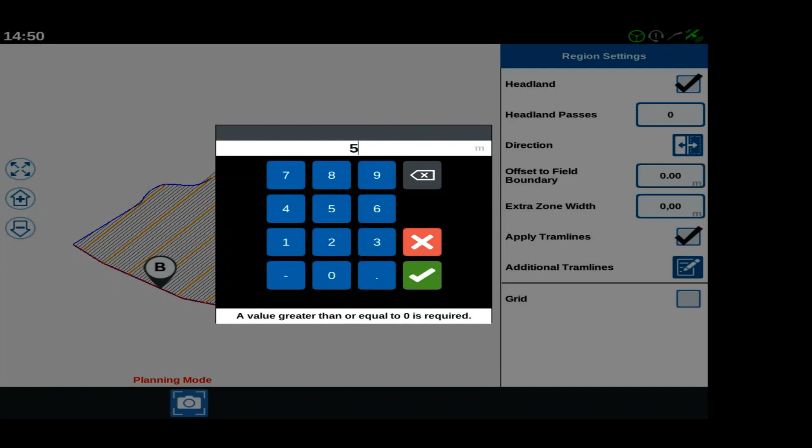So now we're going to change B. I want to have 5 passes. Or sorry, I don't want to have any passes. I just want to have an empty headland, so extra zone width of 5 meters. So now you see there's just 5 meters that will be empty headland because my planter will turn off as I get to the headland. I don't want any tram lines, so I can disable it. That's fine, it's a headland. So this is how I want to have my headland B.

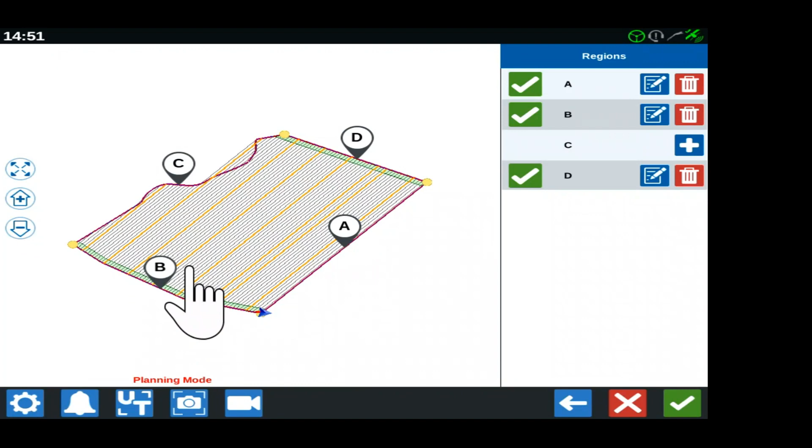The next headland that I select will take over the properties of the last edited headland, in this case B. So now if I press D, it will take over the properties of headland B. If I would change things again in B and then select C, C would take over those properties again. So if I select C now, it will take over the properties, but I want to have some passes in C because I want to plant on that strange part as well.

So I say I want to have 5 passes, and then I want to apply a tram line as well. As you can see, there's still an extra zone width, so it would be possible to have an empty path in here for me to drive, for instance, but I don't want to have that. So I don't want to have that extra zone width.

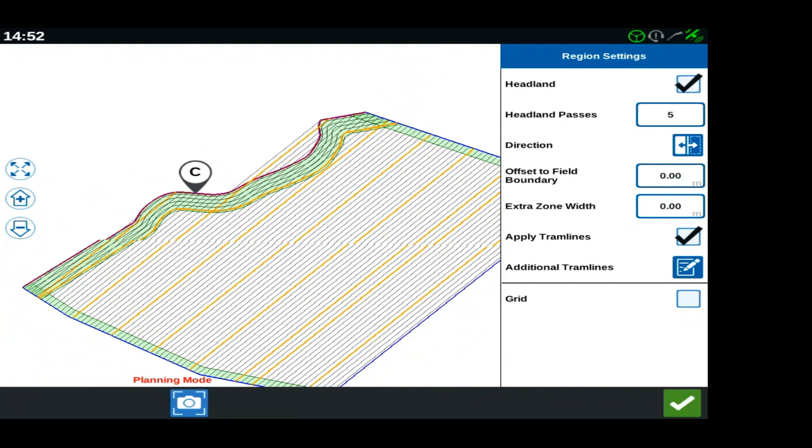So now when I start planting, I start in region A. Now still C is still selected, but I start in region A. I work my way all the way up to there. And then when I have region A fully planted, I switch over to region C, because then I'm able to plant in region C. And that way I can plant the entire field.

So now we have created our operations plan. And it's good to know that before you make an operations plan, that you kind of think of what you want to do, because it's difficult to change an operations plan once you have started the job. So that's why it's also called a plan, because in general, you think a little bit about a plan.

So please just try and create the field boundaries during the winter, drive over the frost or whatever to create your field boundaries. Try, if that's possible, of course, it should be possible. During this winter, it was a little problematic because it was a little wet, but if possible, try to create those field boundaries in the winter.

And then before you want to start planting or seeding, create the operations plans in your office. Just take your terminal to the office. It's possible to do that, and then create your operations plan before you start working. Because then once you're in the field, you don't have to go through all these settings again.

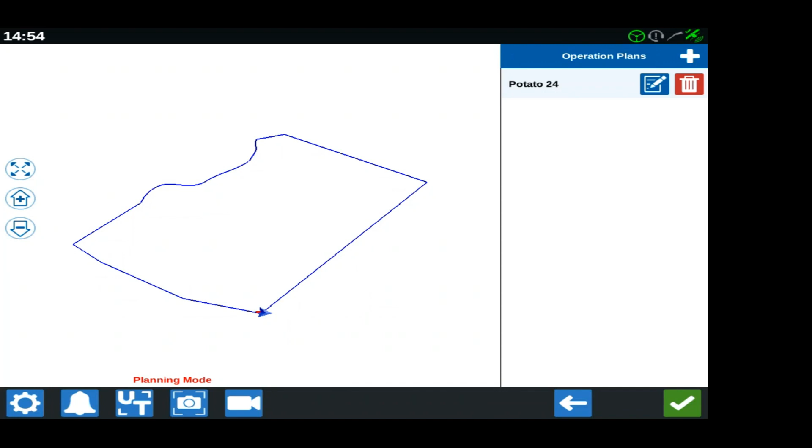So now we accept it. We have potato 24. We've created our operations plan. And now we can go to our job. And then in the operations plan, we can select potato 24. And as you can see, it will now ask you what region do you want to start in. Well, like I said, region A is our main region. So now I select region A and now you will see D, C, and B turn red.

So now I start my job and now you can see that we can start planting. Region A selected, my tram lines are there. And now if I wanted to, I can start planting. So now I activate my master switch. I start driving and now we can go planting. Well, I speed up a little bit because otherwise it takes a little bit too long.

Ooh, oops, oh, like I said, my foot's a little heavy today.

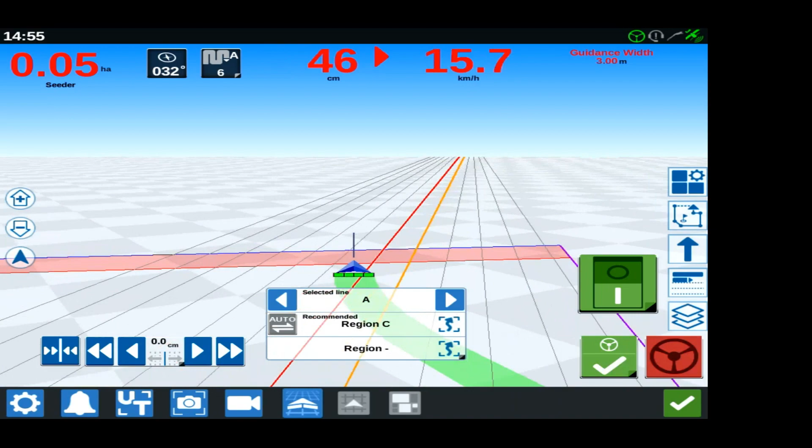So now we get to the headland and that's the red area. And as you can see, the section control will stop. And that's also for outside of the field boundary. Like in the previous job, I didn't have an operations plan, but I created a field boundary. And once we have created a field boundary, the system won't turn on the implement outside of the field boundary unless we overrule it. Otherwise, if we have automatic section control, the system does not turn on outside of the field boundary, or in this case, in the headland.

So now we're gonna go to here again. And as you can see, it'll turn off as well. So now we pretend like I planted the entire field. I'm not going to do that because that would take me a very long time, but I'm just going to pretend I did that. I planted the entire region A.

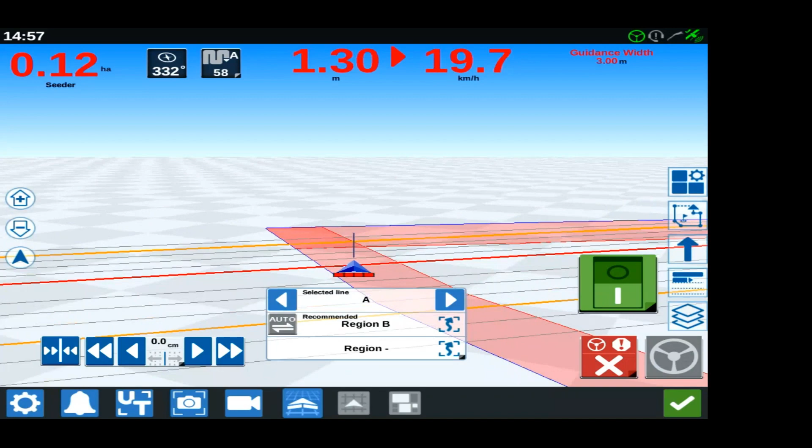So now what I can do is I again push region C. So now we have planted region A. And now I am able to start planting in region C. So I can do that last. So now the system will slowly guide me over the curved lines to finish up my planting.

So now I finished planting, and when I come back, I can select the same operations plan. So when I come back with my ridger or with my haulm topper, I can use the same operations plan. So I don't have to change anything whatsoever, just select the same operations plan. So now we have kind of discussed that part, the creation of the operations plan. So now I'm gonna close this job because we have finished planting. So I'm gonna close my job.

And now I'm gonna quickly switch around to my ISOBUS implement. I got a sprayer there with me. I have to build it around. Switch over, plug it in. So this should do the trick. Yes, so now I have a demo sprayer attached. So we go to the UT. That's where all your ISOBUS implements show up.

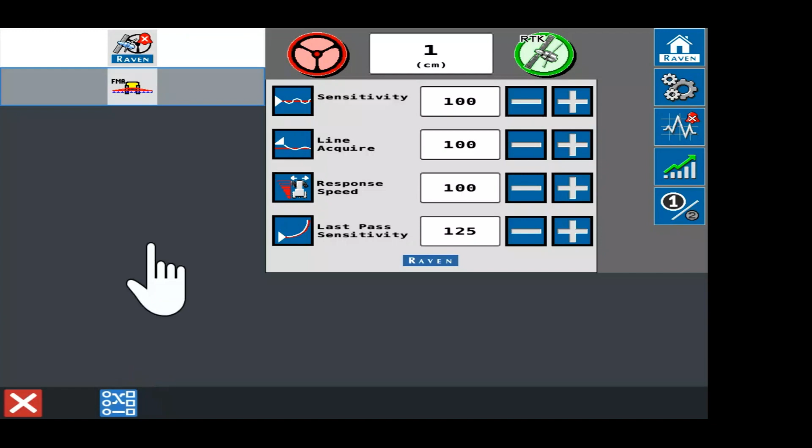And now you will see here that my sprayer is there. So this is my sprayer. And you will see that sprayer is here. So object pool is loaded. So now we go to the machine garage again.

So main menu, machine, and then I push on the back of the tractor again. So this is for drawn implements, but my sprayer is not drawn. It's in the hitch. So we push that button. You can just push on the tractor, and now I disconnect the seeder. And now I mount equipment again. And now I go to the bottom of the list, and there you will see the sprayer.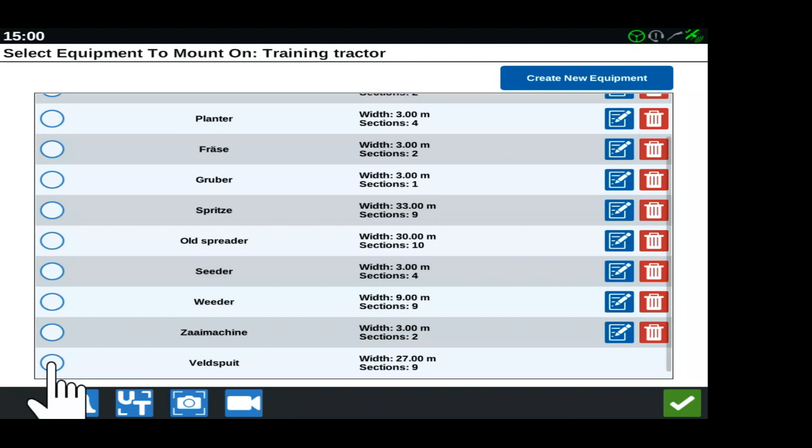Now do I know it's an ISOBUS sprayer? All the virtual elements can be deleted and can be edited, but an ISOBUS implement cannot be edited, cannot be deleted. As soon as I unplug it from the IBBC on the back of the tractor, it's also gone from the machine garage. So now I connect it, and I'm also not able to change the width or the number of sections because that's all taken from the implement. So I can't change that. If you want to change that, you have to change it in the UT of the implement.

So now we go to the next. The same for here. It's all grayed out because I can't change it. It's taken from the UT. And it says here as well, value set in UT. And then we push the green button. And now my sprayer is connected to my tractor. So now we go to the green button, push the green button.

If I have an ISOBUS implement that has, for instance, a working width of, let's say, 8 meters, but I want to work with it on 5 meters, I'm able to override it here. But pay attention, when you override it, you have to fill in a value, and then the next time it could be that the enable user override is still activated. So if you do it, keep it in mind, deactivate it again when it's necessary, because now it's grayed out. But if I enable it, I can fill in a value to whatever my liking is. Not going to do that, but just keep that in mind. It's possible to override the guidance width of an ISO implement in that way.

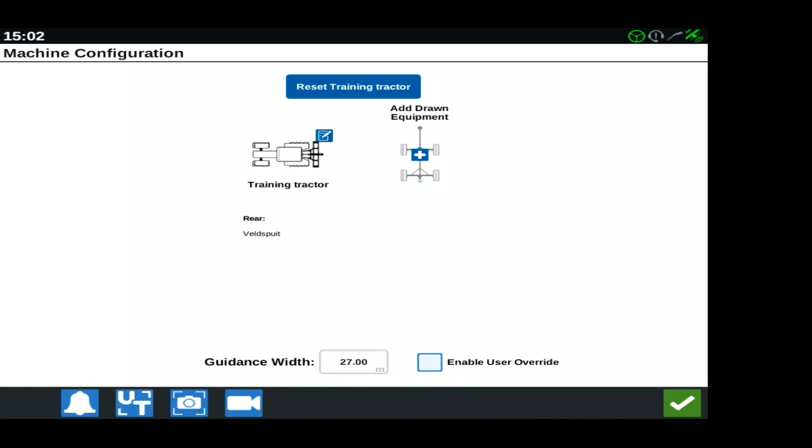So now we have our ISOBUS sprayer attached. So now we go back to our field we just created with the potatoes. We start a new job with our operations plan, because I want to go spraying in my potatoes in this case. So I call it spray potatoes. And then we go next.

And now this page becomes important, because in here you have to give the rate that the sprayer has to apply. So if I would continue right now, and I would turn on the sprayer and our system so that we can apply our product, nothing will happen because the rate is set to 0 liters per hectare. So the sprayer thinks, desired rate 0 liters per hectare, great, I don't have to turn on. So don't go too quickly over this page when you're working with an ISOBUS machine, because you have to give in the rate.

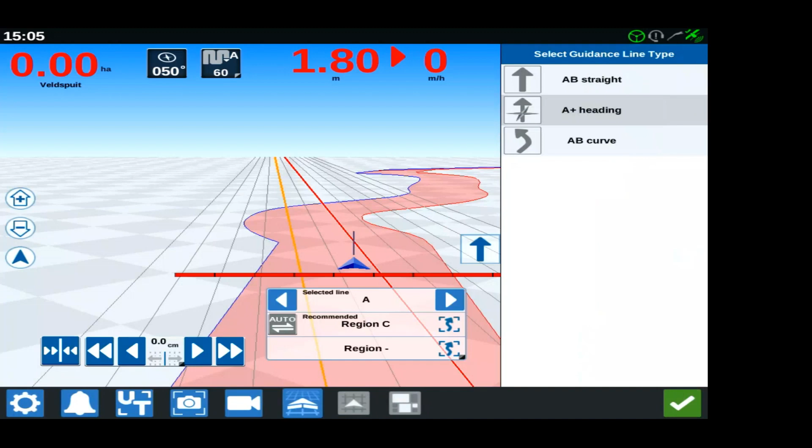Now, we have a nice feature for this. If we go to the job settings, I am able to allow the sprayer mode; at the moment it's enabled. What does the sprayer mode do? Oh, wrong line. If the sprayer mode is enabled, it will only show me the tram lines. However, this only happens when I come back with a machine that's at least 3 times the working width.

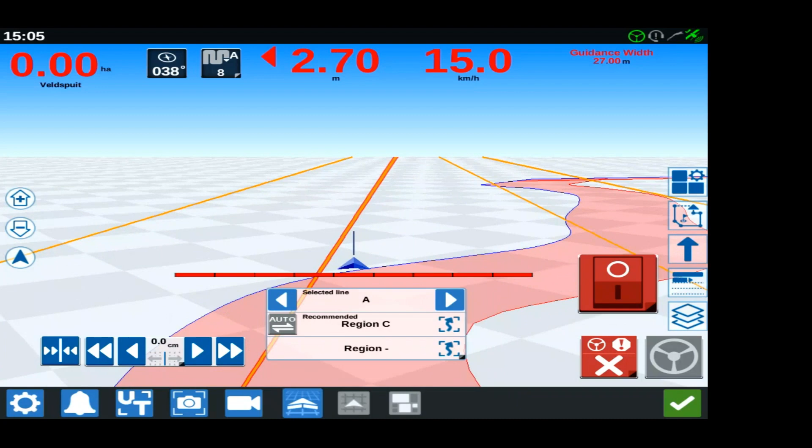So in our operations plan, we said that our swath width was 3 meters. So if I come back with an implement that's at least 9 meters or even more, then it will only show me the tram lines. So now when I come back with my sprayer, it's really nice that I can only see the tram lines and that I don't have to see all other lines that are present in the system.

Of course, when you come back with a machine that's, for instance, 18 meters, you want to see every line because otherwise it doesn't match anymore, but then you can just disable the sprayer mode. But for now, I'm just going to leave it enabled because I don't want to see all the other lines. So now what I can do, as it's the CR12, I can say I want to split screen.

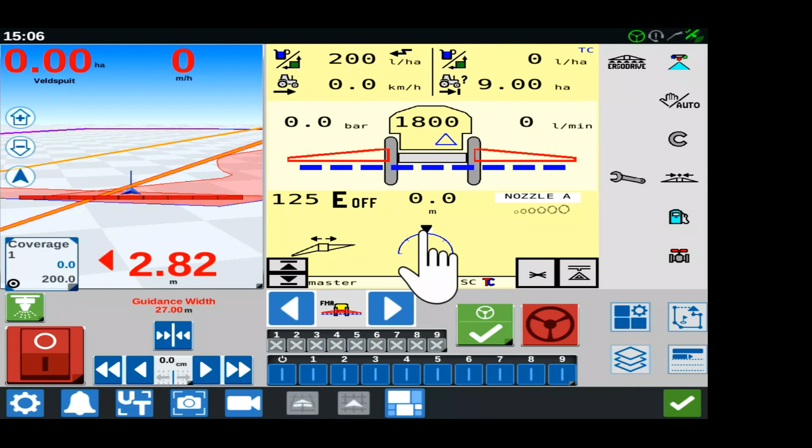So now I am also able to see the UT of the sprayer. And I also want to change my widget profile to, in this case, sprayer. But sprayer is more of an ISO implement. So if I have a fertilizer spreader, I can use the sprayer as well. So now I change it, and now I have certain ISOBUS widgets that can be useful when working with an ISOBUS machine.

So first of all, I start my sprayer. This is my sprayer icon in this case. So I activate the sprayer. Sprayer is now active. And as soon as I start driving, sprayer still won't turn on. How come? The sprayer as well as our master switch both need to be active in order to start spraying. So now when I activate our master switch, you will see that the system starts spraying. So now I've activated the guidance as well. So now our system starts spraying.

What do we see more? We see here the product rate. So the rate, how much is desired. So we said we want to spray 200 liters. And how much is the actual rate? At the moment, it's 199.

If I push it once, 2 arrows will pop up. And if I hold it again, a menu will pop up and it will show you the bump value. So in this case, I put it up to 50. What does it mean? Every time I push this button, the desired rate will go up 50 liters or down 50 liters. So that way you can change the rate to whatever you like.

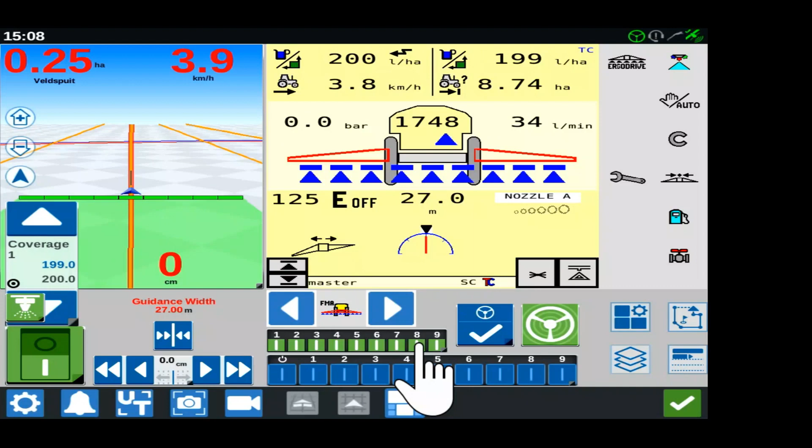What else do we see? So we have the rate that we can change and the actual rate, and you can see it in here as well. So the actual and desired. We also have our section status. So here you see the top one in this case is the status. If I move around, you can probably see it. What sections are active and what sections are not active. So at the moment, section 9 is not active, and the other sections are active.

The one on the bottom, that's a switch box. So we can use that to overrule the section control. So at the moment it's blue, and when it's blue, it means that the section control is done automatically. On the left side is the master switch, and then here are all the individual sections.

So for instance, when you are working with a fertilizer spreader, you are done. You created coverage everywhere in the field, but you want to empty out the fertilizer spreader. Normally when you have section control active, it's not possible because it won't let you be activated and drive over the covered area. It is of course possible to disable the section control. However, it's then also possible to just push this button. Now all sections are red. So wherever you're driving, it won't ever turn on.

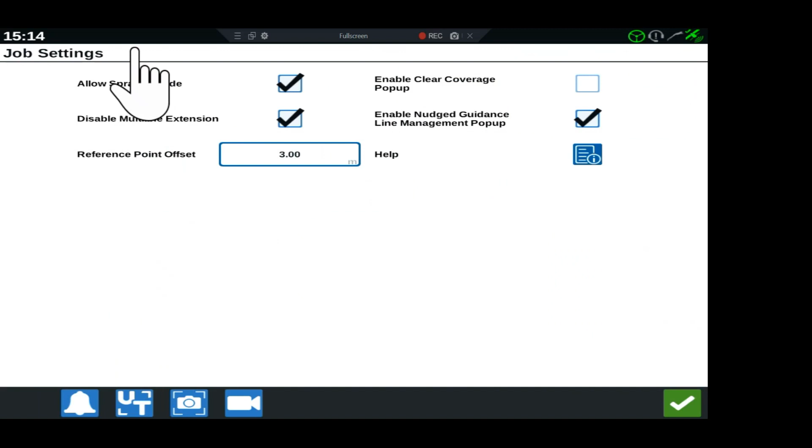I see that we have a question. So to activate or deactivate the sprayer mode, because that's the question, we go to job settings. In the main menu, job settings, we can find the option allow sprayer mode. So we can enable that if we want to have that, or we can disable it when it's undesired to have that.

And here as well as in other menus, if you don't know what it exactly means anymore, there's this help button. So what does the sprayer mode do? It'll show you what the sprayer mode does. So if you push the help button, you will get information on what each of these features does. So that's where you can find the allow sprayer mode.

So to get back, in the main menu we have the section control settings, and here I can change certain settings, not all of them, for section control. And here, if I just deactivate this button, so disable it, my entire section control will be disabled. Good to know. The next setting is zero speed turn off.

So as soon as I stop, or almost as soon, there's of course a little delay sometimes for the sprayer. But as you can see, as soon as I stop, oh, this is not a good spot. It takes a couple of seconds because there's a delay in the sprayer, of course. My sections will turn off.

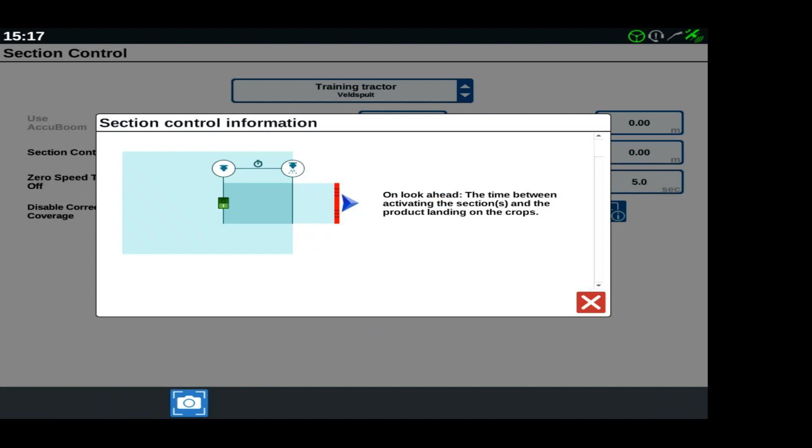So we have some other values: entering overlap, exiting overlap, boundary percentage overlap. I can imagine that it's hard to know what all of those values mean, and I can tell you, but since I've told you a lot already, I can imagine that it's a lot to take in. That's why, if you push the help button here, each of these settings will be explained with a short text and a schematic overview of what it does.

So if you want to change any of the values, or you see that your work is not as good as you want it to be, and you have an idea of where you want to change it, you can just go here, see which schematic matches with what you want to change, and then you can say, oh, I want to change the boundary percentage turn off. So how much overlap with the boundary? Or I want a coverage percentage turn off. So how much percentage overlap is allowed with the coverage?

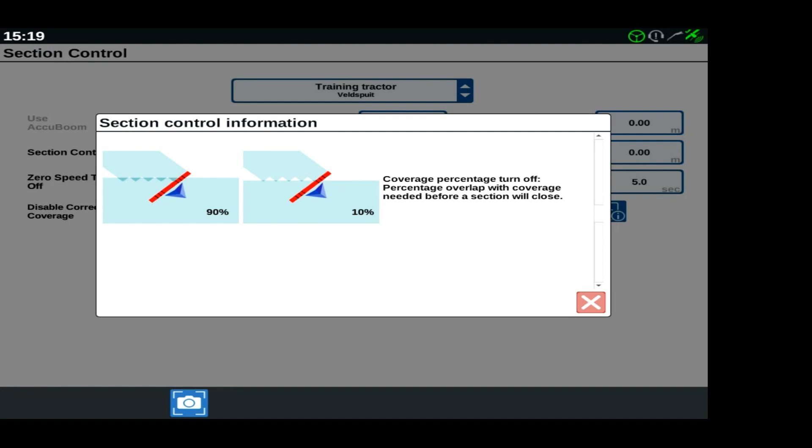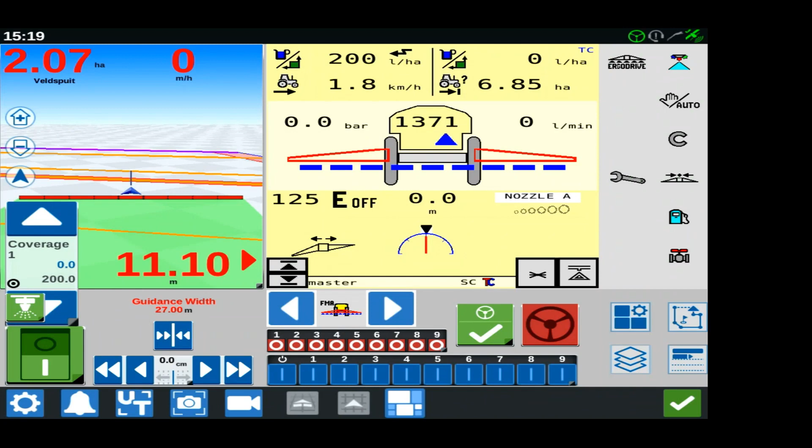So by pushing help, you get a little bit more information when you're working with the machine in the field. So you don't have to look it up. You just push help and then you can see from each setting what it does. So that's in a nutshell how to work with ISOBUS implements and also on working on the tram lines.

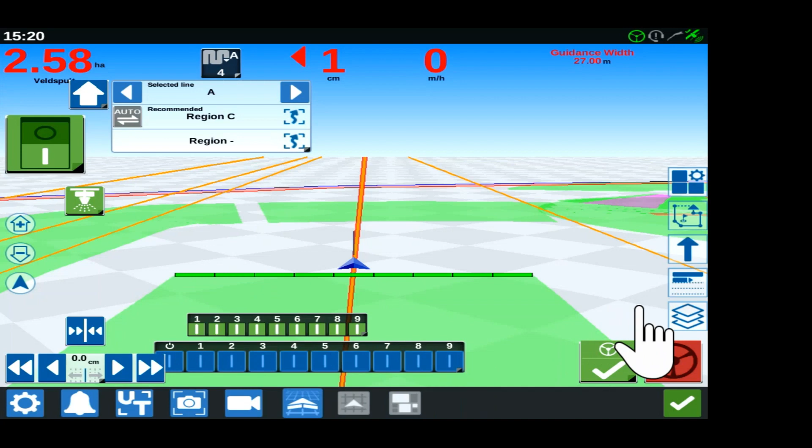I just wanted to show you one more thing because we've created a lot of coverage by now, so that's real nice. All right. So now I push the big button again. And I just wanted to show you the layers. So if I go top view, and now I select the layers and I select direction, I'm able to see the direction I have been driving in. That's also possible for the velocity and the altitude.

When do you want to use this, for instance? When you are weeding, let's say it like that. So when I'm weeding today, I'm driving east-west as an example, and tomorrow I want to go against it. I enable the layer for the direction, and then I can see the direction I'm driving in. So that's what I'm seeing now.

So tomorrow when I come back, what I do is I close my job. It's tomorrow. So yesterday we weeded the entire field. I start a new job. Today I'm going to weed again. It's a busy field. It's just an example. So since we haven't created coverage today, but I want to see the direction I was driving yesterday, because I want to go right against the direction.

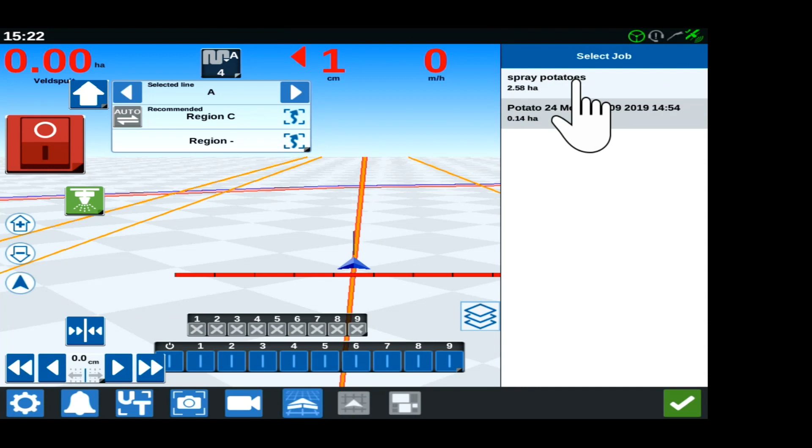I go to my product maps and then I push the plus, and with the plus I'm able to show the layers, so the direction and velocity layers that I created in a previous job. Now I select direction, spray potatoes, and now if I go to the top view, it'll show me how I was driving yesterday. So that's when you want to use the plus.

Otherwise, if I would have chosen it here, it wouldn't show anything because I did not create any coverage today. So therefore, I need to do the plus to get the coverage created in previous jobs for my direction or my velocity and so on.

One more thing that I forgot to mention. So now we've discussed the creation of fields and working with ISOBUS machines. I was planning on doing that at the start, but I forgot. In the UT, you can find information on the RS1. So now I've selected the RS1. And today I'm driving on my T6 and tomorrow I'm driving on my T8.

What I have to do is I go to the gears and then say change profile. At the moment I don't have another profile available, but then I can push the button, for instance, if this is my T6 profile, I change profiles for the RS1 here, because that's important, because each tractor requires its own profile for the best performance of your steering system.